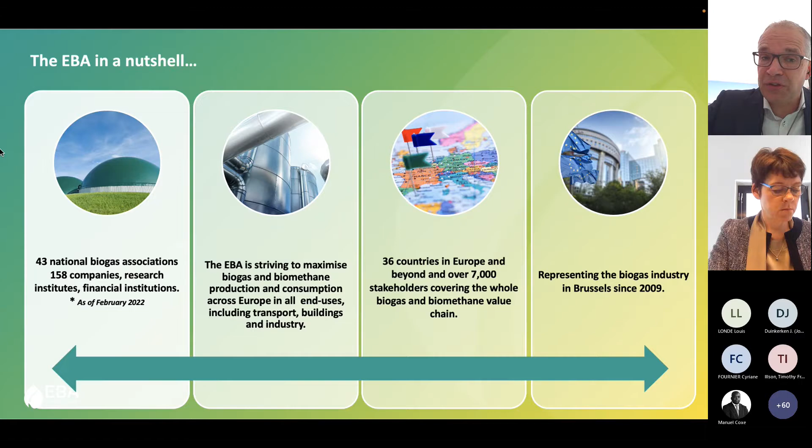So let me go first to where we are. The next slide, please. A little bit first on the EBA itself. So we are an organization comprising now, actually, this is already outdated because we are growing very fast, over 200 companies and associations directly related to the EBA, representing around 7,800 stakeholders within the 36 countries in Europe and beyond. So with that, we are actually one of the larger associations within Europe, although we are still seen as small, and I'll come to that a little bit later.

Next slide, please. So where are we today? Today, we produce 18 billion cubic meters. That is as of 2020. Those are the numbers. We are compiling 2021 at this moment, but 18 billion cubic meters of energy on the biogas side. Just a bit less than 3 billion cubic meters is biomethane. The remainder is biogas for CHP, so electricity and heat production.

But when you look at the various reports which have come out in the previous 2 years, we see that there is a consensus about the potential for 2030, that is around 35 billion cubic meters, and then reaching up to 100, or even, in the latest report from Engie, 160 billion cubic meters on the production of biomethane. That is not biogas, but biomethane.

Now, on top of that, we can even produce e-methane, so combining the CO2 with hydrogen from peak loads on the electricity net, and that would actually help another part of biomethane production, an extension of 60% on top of the already 100 to 160 BCM. So with that, we can be anything between 30 to 40% by 2050 alone by biogas or biomethane. If we add the e-methane part, we can be an even larger share. By 2030, which is of course closer, we can already do 10%, depending, of course, on the total gas consumption.

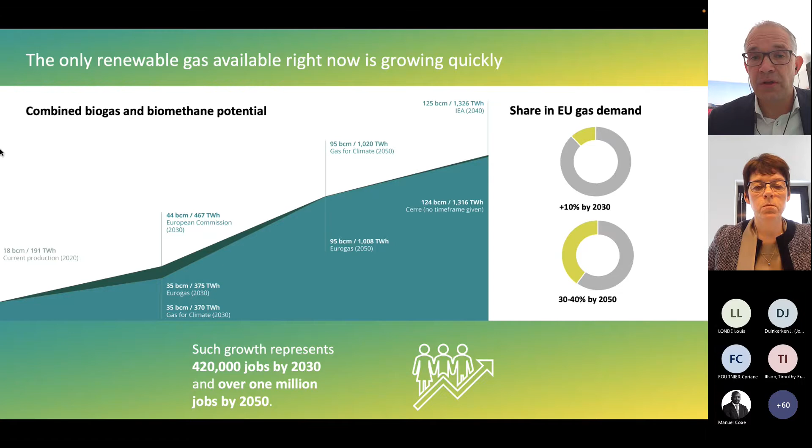As you all know, we are hugely dependent on the gas supply from imports, and there we can put something valuable on the table. We can produce locally as well as provide a significant portion of the renewable gas supply in future.

Now, a question we get almost daily is, sure, you can produce, but is it sustainable? The simple answer on that is yes. We can produce that from food waste, from industrial wastewaters, municipal wastewaters, from agricultural residues, no use of monocrops, but use of course of sequential cropping in combination with carbon sequestration. Next slide, please.

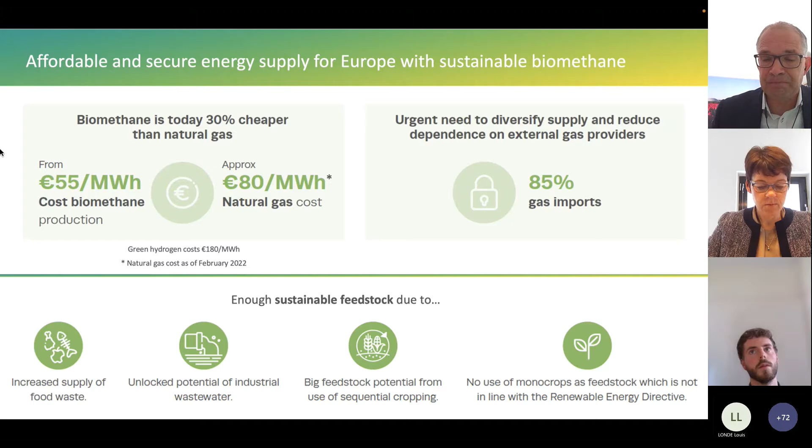Now, on the 8th of March, the European Commission came out with the REPowerEU plan. And within that, they set a target of 35 billion cubic meters of biomethane by 2030. This means that we as industry, but also all people and companies connected to this, need to ensure that we are ready to actually make this happen. For the industry, this means that we are aiming for 5,000 extra installations in the coming 8 to 9 years. 5,000 sounds a lot. It is not that many. Germany already did 6,000 installations, be it smaller, in 9 years' time. So in the whole of Europe, putting in 5,000 installations is doable.

And again, I said in the very beginning, we are sometimes looked at as small. That's because we are localized. And that just gives some food for thought. Being localized is not bad, because everything we do in scaling up often ends up with a lot of downsides. Of course, the obvious example is the fossil industry, where we scaled up humongously, and now we are stuck with all the downsides. So localized production, providing localized jobs and integration with, for example, organic fertilizers and the whole integration within society is very important. Next slide, please.

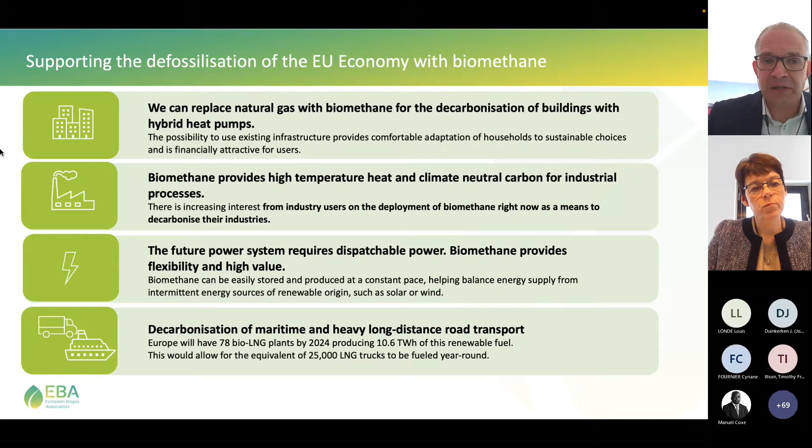So where can it be used? I probably do not have to tell you, because you're all gas experts. It can be used in the buildings sector, it can be used in the industry itself. It can be used for dispatchable power, of course, and not to forget also for transport. Next slide.

So what is then important? And that is the gas infrastructure. By utilizing the gas infrastructure, we can save Europe 217 billion euros per year just by making sure that we keep the gas infrastructure there. That is of the utmost importance.

It means that we also need to make sure that it is all easy to use. Easy to use because in every country there is almost a different set of rules for injection of biomethane. And it becomes a little bit of a problem, I have to say. Denmark allowed 0.5% of oxygen and proved it to be possible, whilst in other countries, Germany, it is very low. I don't have the number for the injection in Germany, but I do know that at the cross-border interconnection point, it is even lower than the injection point within Germany itself.

What we need is renewable industry. We need renewable gas. We cannot afford to set rules which try to mitigate the risk to 100%, while it doesn't bring us anything. So we need to be pragmatic, and we need to harmonize across Europe, also on the oxygen content. And just to be fast and to give you some ideas, what we think is needed is to set one rule for oxygen content throughout Europe, and where we think there might be possible problems in the future for some gas storages, have centralized oxygen scavengers at those places.

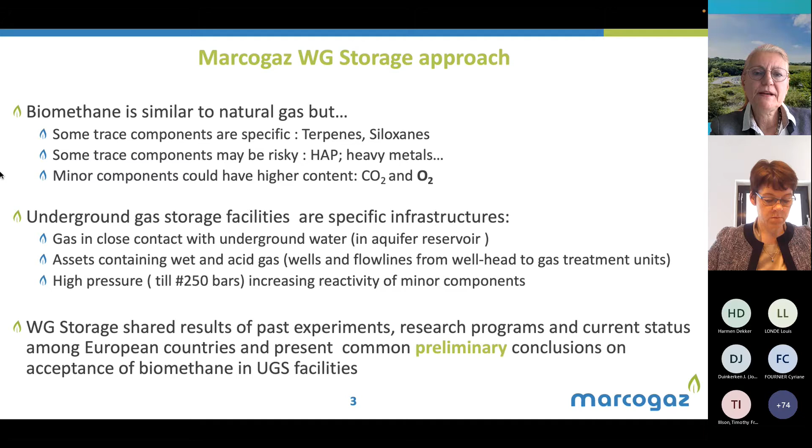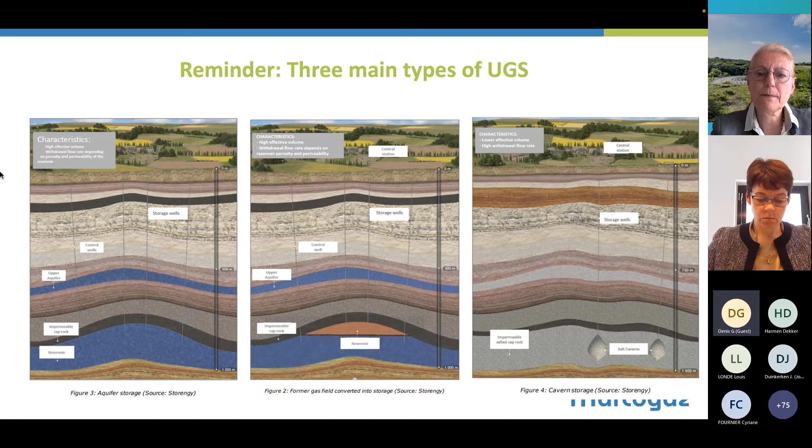The gas in the subsurface is injected and withdrawn through wells, and these wells are connected to the facility by flow line. On the central facility, the gas is compressed, either to inject the gas or to withdraw it, or both. The gas is treated to remove water and to remove H2S in certain cases. And the gas quality is checked and the gas rate is measured. So that is the main design for UGS. Please, next slide.

So now let's focus on this topic of the trace component. Our conclusions are mainly based in a 2016 and 2018 French study. This study performed measurements. More than 200 compounds in the biomethane were searched and around 40 were actually measured. The biomethanes come from different feedstock and processes. Some siloxane were detected, but in very low concentration. Heavy metals were present, but very low concentration too. And in this data set, polycyclic aromatic hydrocarbons and halocarbons were not detected. According to this data set, the cryogenic purification or pressure swing adsorption process generates a biomethane containing less trace compound than membrane-based purification process.

To complement this result, reservoir modeling to quantify the impact on subsurface water was performed. The results are consistent with standard biomethane quality, EN 16723, and the technical report CEN 17238 about contaminant for biomethane. The results of this study were published during the 2018 Gas Research Conference and in the 2020 International Gas Research Conference. The project is going on with 500 compounds analyzed and 70 different biomethanes. And this new result will be published in the 2022 Gas Research Conference. On its side, GERG is currently conducting a pre-normative research on biomethane, and we will have detail with the next speaker. And it is expected to produce a wide database on the composition of biomethane and biogas in Europe. Next slide, please.

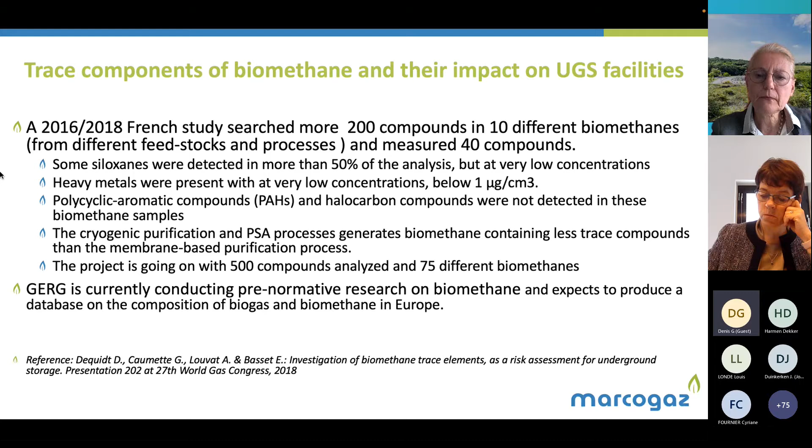So let's skip to the oxygen impact on the UGS facility. And this topic is a concern for every type of UGS, whereas the trace components is mainly a concern for aquifer storage UGS. So where this oxygen comes from? It is due to air or oxygen injection in the digester to remove H2S. Its concentration could depend on the purification process. For instance, for the pressure swing absorption process, the content is 0.1 to 0.3%, that is 1,000 to 3,000 ppm.

The possible negative effect on UGS may impact either the equipment or the reservoir. The list is the following: corrosion in wet gas equipment, subsurface and surface sulfur precipitation, generation of black powder, which are pyrophoric iron, accelerated degradation of glycol in dehydration unit, blockage by oxidation of mineral in formation water, and impact on biological equilibrium in porous reservoir. The consequences are dependent on oxygen concentration and pressure. The maximum concentration is an important criterion, but the total amount of oxygen injected in the UGS over a certain period of time is also a very relevant parameter.

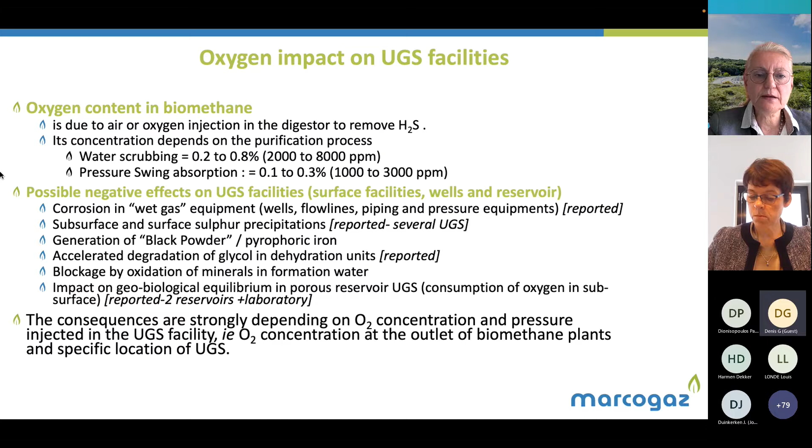The current situation is specific to each country according to its gas grid, to its storage, and to its current facilities. And all these rules are not crystal clear by now. And just to remind, the European standard on the topic says at the moment 10 ppm, except in case there is no sensitive installation downstream, that means UGS, for instance. In this case, 1%, that is 10,000 ppm, is accepted.

Next slide, please. So these are our preliminary conclusions. As far as trace components are concerned, based on the available data and the simulation modeling, biomethane storage in deep aquifers shouldn't create any significant impact on water quality of the aquifer. But we recommend that measurement campaigns should go on to confirm this conclusion and to extend the data set.

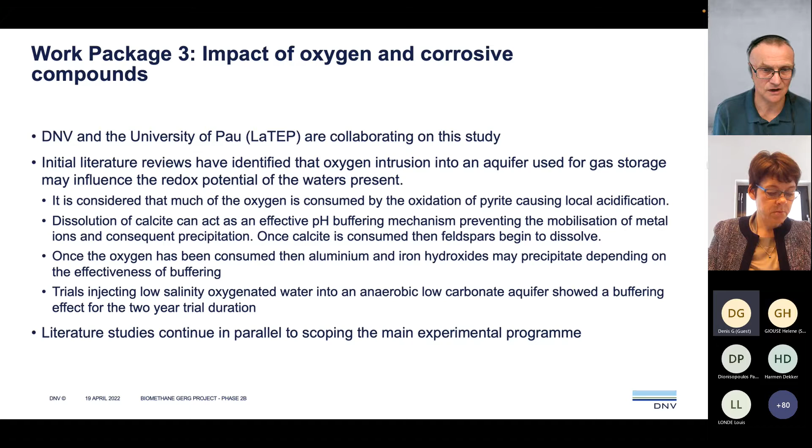The next slide, please. So what we realised fairly quickly was that we're going to need a really good liquid phase analysis protocol so we can work out what's actually happening, and that we need to develop that before we can start on the main experiments. So between DNV and the University of Pau, we've now defined this experimental program to validate the analysis protocol, which is going to be our base tool, really. And we've got the reagents and equipment all arranged.

So what we're going to do is use ionic chromatography and ICP, or inductively coupled plasma optical emission spectroscopy, which are really good techniques for monitoring key chemical species as they change during the tests, because this will be a dynamic sort of environment. We're just about to test that using batch tests.

So just to test the protocol, we're going to be injecting air, basically, there's 20% oxygen, into some simulated reservoir waters. We're going to use a pyrite powder, and we've arranged the equipment so we can sample the liquid phase to analyse. So we'll take some out, analyse it, leave it a while, take some out, analyse it, and we'll get on with that in the next month or so. And there's a nice ICP there.

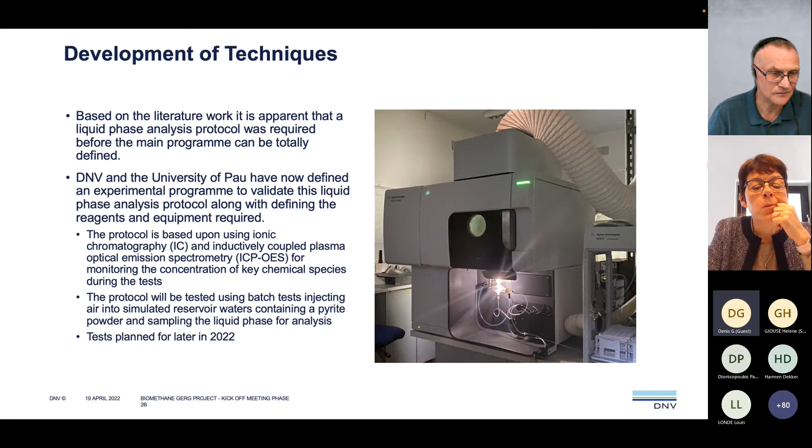Next slide, please. So once we validate our analysis protocols, we've got preliminary concepts for the main test program. So this is actually a reservoir simulation, effectively. There's two ways of doing this. We can either carry on with the batch testing, or we can do some dynamic column testing. Either will actually work for this sort of study.

The slight issue with dynamic column testing is it could actually be quite difficult to detect some of the species in a flowing column. So at the moment we're thinking of using the batch concept, but we're still open to the dynamic one, depending on how the experiments go. On the right there you've got a schematic of how we can do this effectively.

So what we do is we inject a simulated biogas with varying partial pressures of oxygen, because certainly for underground storage, partial pressure is probably more important than concentration. Temperatures between 20 and 150 C to give us some ideas of temperature dependence. And then we're going to put in the simulated reservoir waters, a solid phase, so we can have pyrite, so we can have oxidation, and the other minerals, calcite, feldspars, etc., to get that interaction.

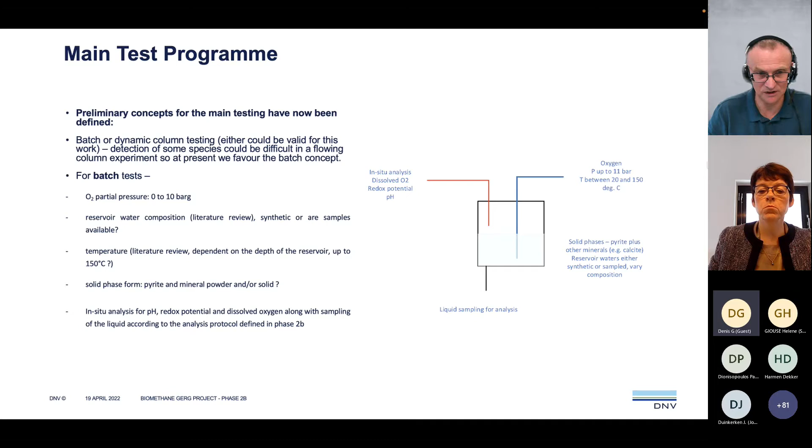And then at the moment we're thinking of using powders just to get good reaction rates, but we could put larger pieces in. And we'll do quite a lot of analysis. We're doing pH, redox potential and dissolved oxygen, and then sampling for all sorts of different species in the liquids. Next slide, please.

If we did flowing tests, which we may well do, in a column, we're thinking of setting an experiment up really based on that of a chap called Berta, who did some similar experiments. And the idea is you set up basically a water in equilibrium with your oxygenated biomethane, and then pump that through a column loaded with, well, if you go to very high pressure, we'll load a core of rock, or at lower pressures, you might put a powder in or some sands with the minerals you're interested in. And then you sample at 4 or 5 points along the column to see how the chemistry evolves as the fluids flow through it.

And we'll be measuring similar things again, the redox potential, pH level, conductivity, dissolved oxygen, and running it through the experimental analysis program. So we're looking at ionic chromatography for the anions, and something like ICP-AES for cations. So we're interested in the evolution of the chemistry, and that allows us to predict and determine precipitation, because this is all about what's the effect on the reservoir. Next slide, please.

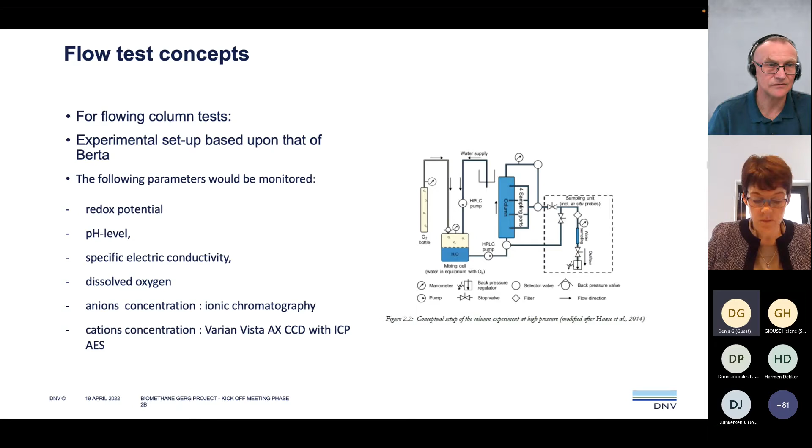Yeah, so as I say, the next thing we're getting on with is validating measurement protocols, starting the main test program and pushing on. That's quite a long test program. We're really interested in what's happening with the oxygen on reservoir water chemistry, in fact, and the mineral species present, so the actual rocks. As I just said, we're really interested in getting feedback from industry on defining what sort of waters and minerals people have got, to give us an idea what sort of range there is over Europe.

Like most GERG things, there's a steering committee. So once we finish, or as we go along, we'll be presenting the results to all the different stakeholders in industry and standardization bodies. And we're going to try and work out between us a risk assessment protocol. As Helene was saying, this could well end up being on a case-by-case basis, because reservoirs are all going to be different, and the biomethane is going to be slightly different. But if we can produce a tool or a methodology for doing that case-by-case risk assessment, it means that any particular storage site can define the acceptable oxygen level for that site, and then that will drive their local network requirements.

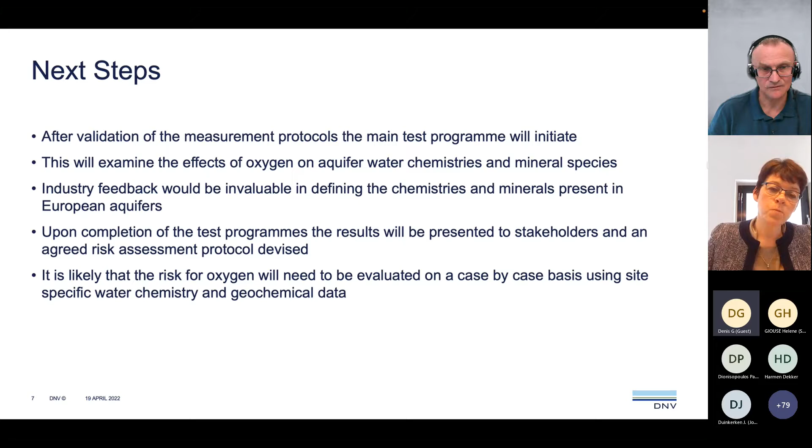Now you're muted, Thea. We all do it from time to time. We get to put on the sound, what has been taken off.

I just wanted to say thank you, Tim. Maybe you could see that from what I was trying to say. It is a very impressive project that is running with GERG. We appreciate that you're sharing the results so far with us, plus the ideas you have for progressing this part.

With this presentation, it leads us to the final of our 4 first speakers. And I would like to give the word to Annette Møller Hansen, who's project manager at the Danish Gas Technology Center, who will take us through a case study on biomethane in Denmark. The word is yours. Thank you, Thea.

Yes, my name is Annette Møller, and I have been asked by the Danish TSO Energinet and its daughter company Gas Storage Denmark to do this presentation on the situation with biomethane in Denmark. Next slide, please. Just to start with the status on biomethane in the Danish grid at the moment. There are currently 51 biomethane plants connected to the gas grid in Denmark, and the average capacity is around 1,500 normal cubic meters per hour, with the biggest producing almost 5,500 normal cubic meters per hour of biomethane. So relatively big compared to the average European biomethane plant. And altogether, they produce almost 20 gigawatt hours daily. So that's quite a lot from a Danish perspective.

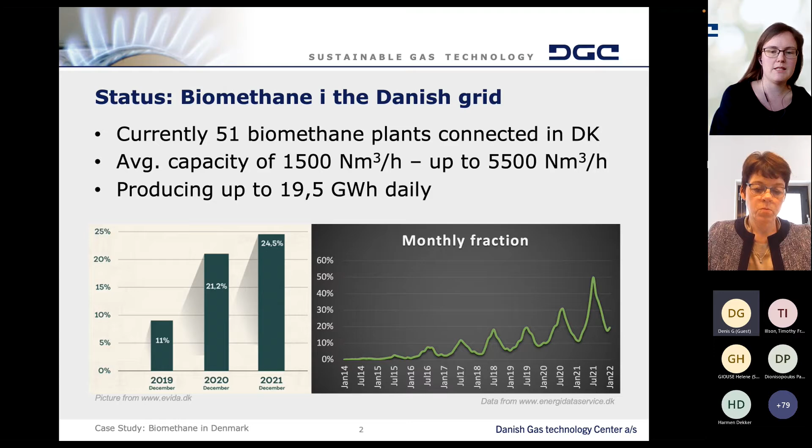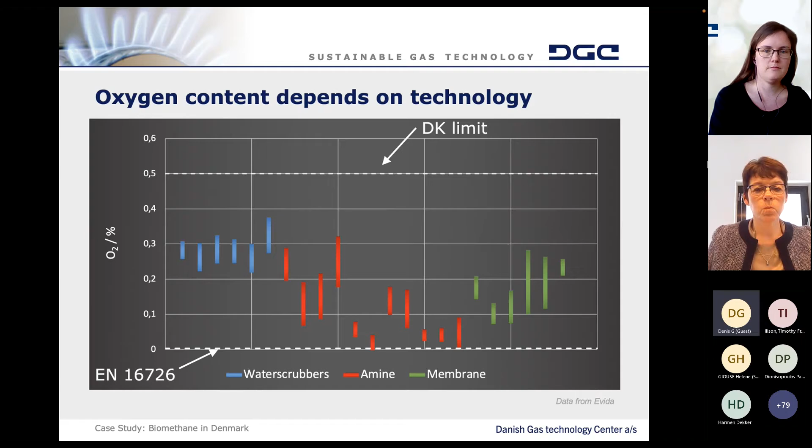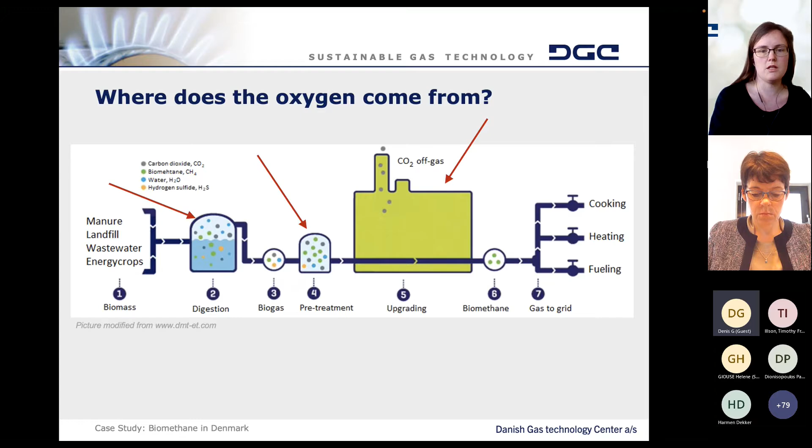So if one wants to produce biomethane that has a low oxygen content, there are three places to focus on. It's the fermenter, where it could come in with the biomass. It's the sulfur treatment, where some technologies require oxygen being present in surplus. And it's the choice of upgrading technology and the limitations of that.

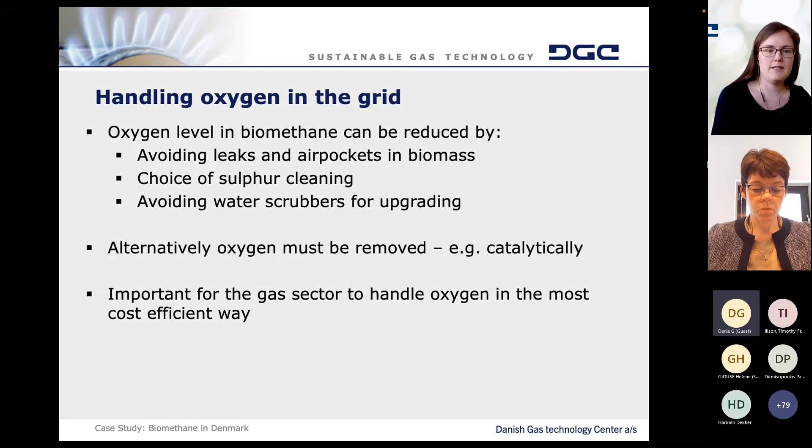If you move to the next slide, please.

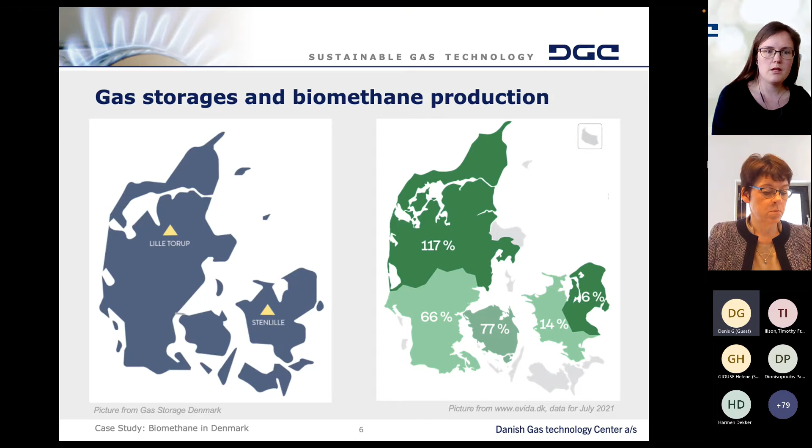So first off, there's Lille Torup that was in northern Jutland, the area with high biomethane production. It's a salt cavern storage, meaning that the general thought is that it might not have very big issues with oxygen. So the main concern from Gas Storage Denmark is that it might increase corrosion rates.

And that is not something that they consider that much of a worry because corrosion has always been an issue and it's already monitored. And a slight increase in corrosion rate is not a major threat, and damage can be repaired, parts can be exchanged. So that's not the main storage they're worried about.

So that's also an important point here, that because of local consumption of the biomethane and because of mixing with the fossil natural gas, even if you have a high local production of biomethane, it doesn't necessarily reach the transmission network and the storages.

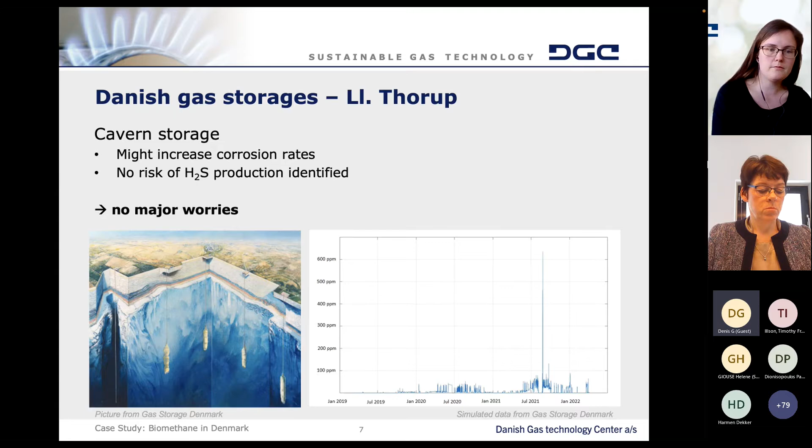And then there's the other storage in Stenlille that was in Zealand, the area with low biomethane production. This is an aquifer storage, so there are some more worries about how oxygen injection might affect the storage. There's of course also here the increased risk of corrosion, but also worries about if it might risk microbial contamination or oxidation of minerals. There's risk of H2S production and souring of reservoir. So there are some more possible major issues there. They're mainly worried about this microbial activity, that biofilm could plug the pores in the storages.

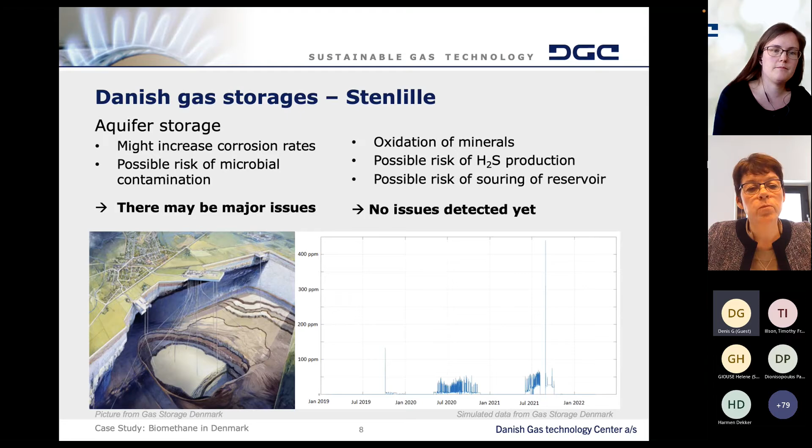So right now, the preventive measure, if the oxygen content becomes too high, is that they can temporarily halt injection and possibly inject more in Lille Torup, the salt cavern, if possible, to try and avoid injecting oxygen in the aquifer storage. But that's of course not feasible in the long run to just not inject if the biomethane share increases and we have to fill up the storages during the summer. So they're looking into future steps of better monitoring of oxygen levels.

There's the Baltic Pipe leading natural gas from Norway through Denmark to Poland that will, of course, naturally and conveniently dilute the biomethane. If all else fails, there's the option of injecting the gas in less sensitive parts of the aquifer, even though they would, of course, prefer to avoid that. And then, of course, there's the consideration of whether it's required to install some kind of oxygen removal prior to injection.

But like with all other storages, they also feel that they need to know more about how to handle this and what's necessary. They are planning to do some microbial growing of some of the sand that's sometimes extracted with the gas, and looking into whether to do some collaboration with research institutes or other storage operators. But overall, their approach is quite clear that either they're part of the solution to this green transition or they're out of business, because they don't see a future in gas if they don't embrace this green transition to biomethane, because then it will be phased out. So they have a very constructive approach that they have to figure out a way to handle this and be part of the solution.